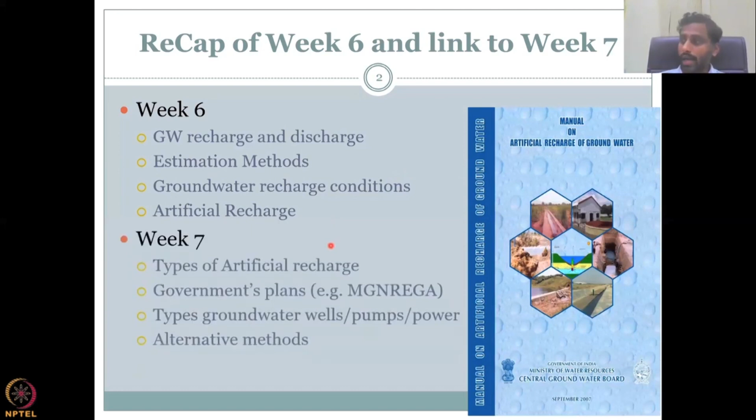So what are you going to look at in week 7? In week 7, we'll be looking at the type of artificial recharge systems, especially for the Indian rural system and the cities. We won't look at international standards because the availability of water, the groundwater hydrology, the geology is different. So we would focus only on the studies in India and the methods that can suit India, which is given here in this book also. There's a plethora of methods. We'll use most of the methods in this lecture.

We would also look at government's plans. This book itself is a government plan, but also how they use schemes to augment groundwater recharge. We would look into types of groundwater wells and pumps and power. Since we are looking at recharge and discharge from week 6, it is important to understand how you get water in and what are the key pathways or key methods in which water is extracted. And that is why we have a session on type of groundwater wells, powers, pumps, etc.

And it is also necessary to look at alternative methods. Similar to recharge, we have alternative methods for increasing the recharge. We also have to find other methods to artificially give more power to these recharge systems and or discharge systems. For example, can we use solar power rather than electric and diesel power, thereby reducing the carbon pollution due to diesel pumps, etc. So all these things we will look at given the time. And some of the methods we'll also look at in the next week.

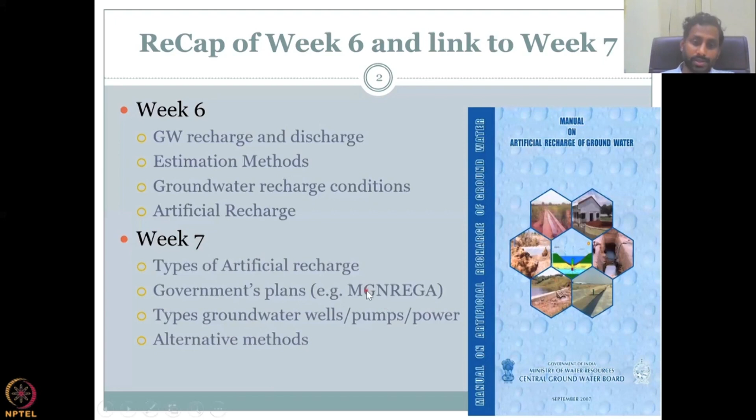Types of groundwater wells, pumps, etc. we'll be discussing. Moving on. Let's look at the planning for structures. Before we even get into the type of structure, it is very, very important to get into the planning. How do you plan what type of recharge structure to build?

Suppose I give you this book and say there are 10 methods. What are the methods that you will use in your location? Let's say your village or your district, or even your urban area. And that comes from a fundamental understanding of what is inside the ground, what is the water availability and the demand.

So it is very important to establish ground facts, as I put at the first point. You need to understand the reality in the ground before you propose these artificial recharge structures. Because many a times you would see these recharge structures, at least in villages, which are broken, not maintained well, and they don't give much groundwater, which means they're a failure. And that happens because the underlying fundamental principles are not understood, or these ground facts are not acknowledged. Let's look at some of them.

Storage capacity of aquifers. If you know the thickness of the aquifer, then you know how much water, given the specific yield, can be stored. You can have a big aquifer, but if the specific yield is very, very high, like for example, gravels, water will just move down. So you're not going to store the water. So this is a very, very important aspect of groundwater recharge for using.

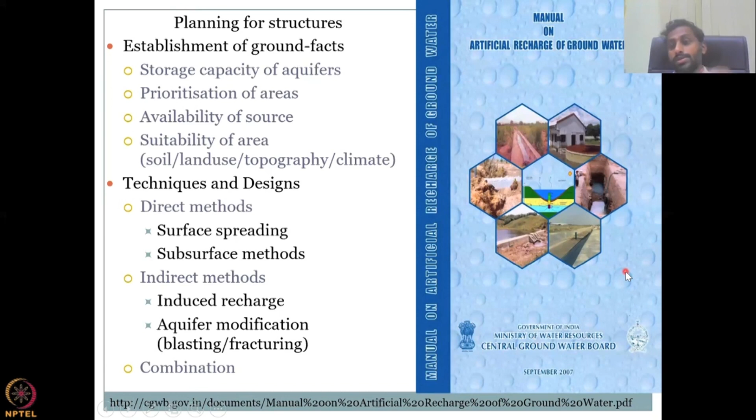So the link for the book is given below. You could see it as a PDF. It is free and anyone can use it. And to be honest, there are a lot of citations inside the book that can also be taken for future reference.

Establishment of ground facts. This is very, very important. If you don't understand what the reality is, you could sit at your office. For example, I'm sitting here in my office and I can put all these groundwater recharge plans, but it won't work. I can even run a hydrological model, MODFLOW, a groundwater model, but it will not run. Why? Because there is a need for understanding the ground facts.

So for that, what are the methods used? Participatory rural appraisal, or PRA as we call it, is a method for interactive processes of social development, wherein you talk to the people. You can see on the ground, Dhan Foundation is doing it. So you communicate with the people, you sit multiple iterations, you discuss the issue, you discuss who is going to take care of it if these systems come in place. Okay. And also understand the actual need for it.

Do you actually need a groundwater recharge activity, or can you manage it with other aspects? Establishing the need, as I said, is very important because you could also have water from channels, you can have water from rainfall, you can better use your demand estimates. You don't need to go to groundwater recharge because you may have enough water, you just don't know how to use it. The other aspect is understanding the other priority needs in the village, because if you have limited resources, you cannot put them all into groundwater recharge, money, time, etc.

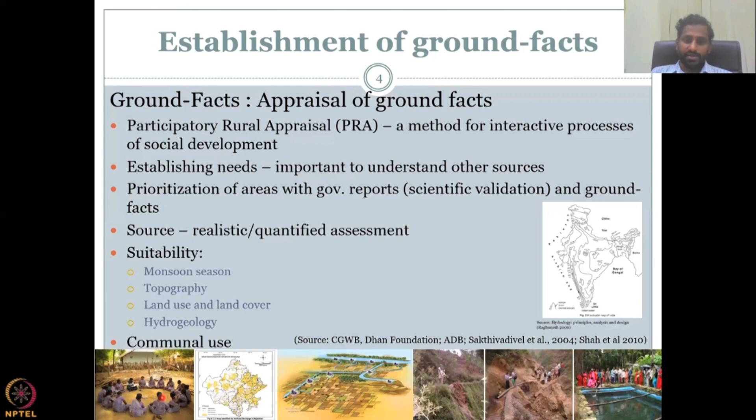Let's look at some of the methods.

The most important is the direct methods. Okay, directly applying water, whereas an indirect is you do a particular method for something else. However, the groundwater gets recharged. For example, forest cover. You increase forest, but by increasing forest, also the groundwater recharge increases because the infiltration increases, percolation increases. So let's start with direct.

In the direct method, you are increasing the contact area and residence time of water so that water and land have more time to talk to each other and then recharge. So that is the problem now. If you don't give enough time for water to talk to land and then say, I'm going to infiltrate and percolate, then recharge won't happen. That is what's happening in a high slopey land. Water touches and goes down.

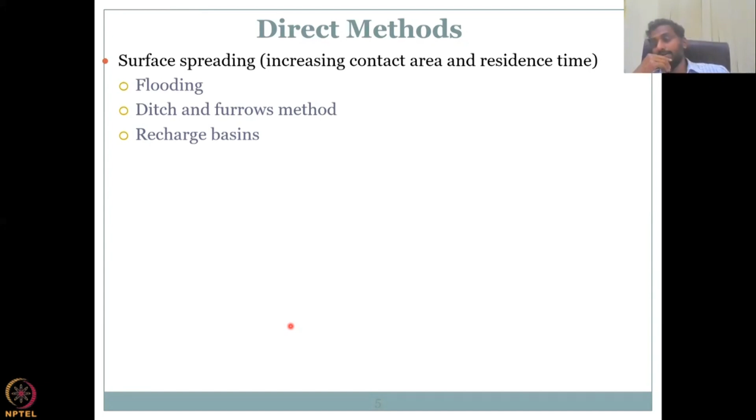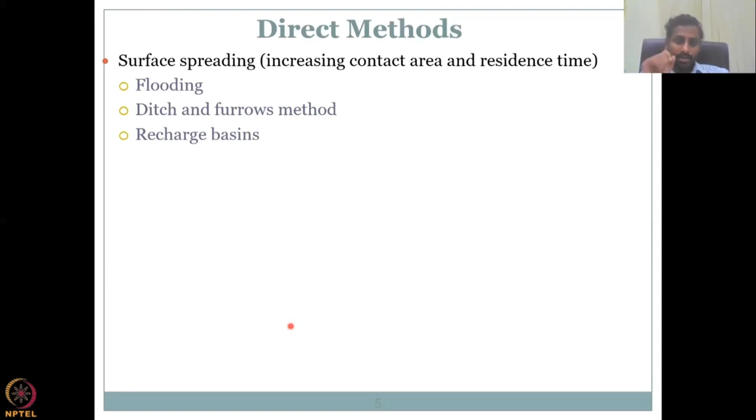Okay. So the surface spreading method actually increases the contact area. I'm going to directly apply water on a land and then recharge it. And of that, there are three important methods for India: flooding, ditch and furrow method, and then recharge basin. In the flooding method, as the name suggests, it is more like you're flooding the entire land, and then you're looking at how recharge happens.

The ditch and furrow method, you are constructing parallel sequences of land furrows so that water can run through, and wherever it is running through, it will recharge. Whereas flooding is just applying throughout. I'll show you some examples. And there are something called recharge basins, which are more engineered, more specific for groundwater recharge, and have some designs, etc. More construction.

Then in the other direct methods, you have runoff conservation methods, basically arresting your runoff. You're stopping your runoff, which is your rainfall runoff. I've showed you in the hydrological equation. Water flows in, and then this water flowing out of the basin is stopped periodically somewhere and then recharged. So some of the methods are bench terracing, contour bunds and contour trenches, gully plugs, nalah bunds, and check dams. Very, very famous word, check dam, because it has actually helped in a lot of locations in India.

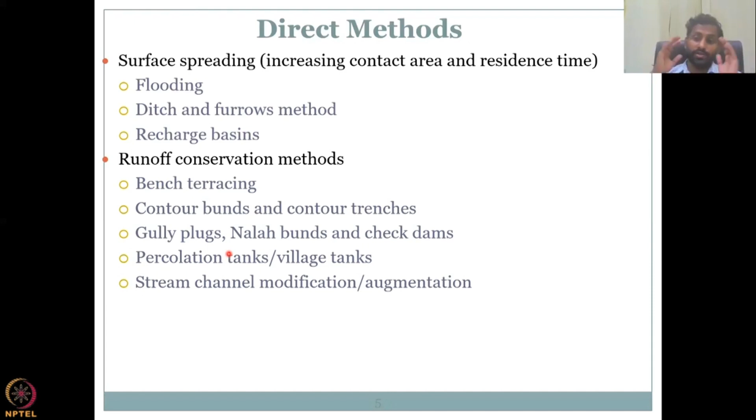Percolation tanks, village tanks. So percolation has a very particular connotation that it has to increase the rate of water moving through the soil profile, and it can happen anywhere, land in terms of rural, urban, peri-urban, etc. Whereas village tanks are mostly for agriculture and for village use.

And then there are subsurface techniques. Okay, the subsurface techniques include the subsurface region. I'll draw here. You have your land, and then you have your subsurface. Then your unconfined aquifer, confined aquifer. Okay. Then the subsurface, which is just the small thickness under the ground, where it is not under the ground too much or not the surface, it is subsurface.

Okay, where you can put wells like injection wells, recharge wells. Injection, as the name suggests, you inject water; recharge, you slowly recharge water. Gravity head recharge wells, recharge pits, and shafts. So this subsurface can go anywhere until your unconfined aquifer, whereas your recharge pits and shafts go much deeper.

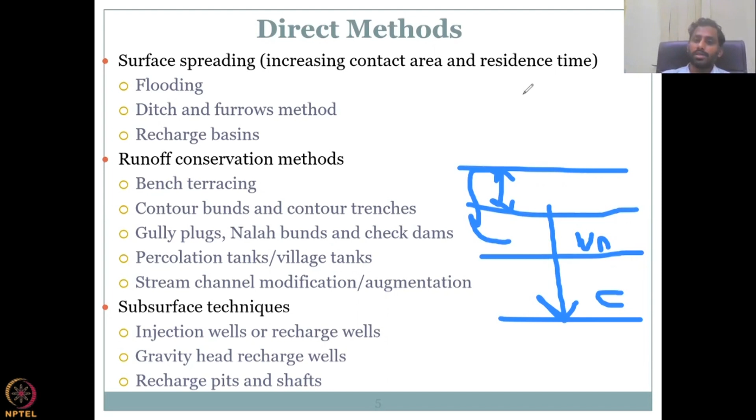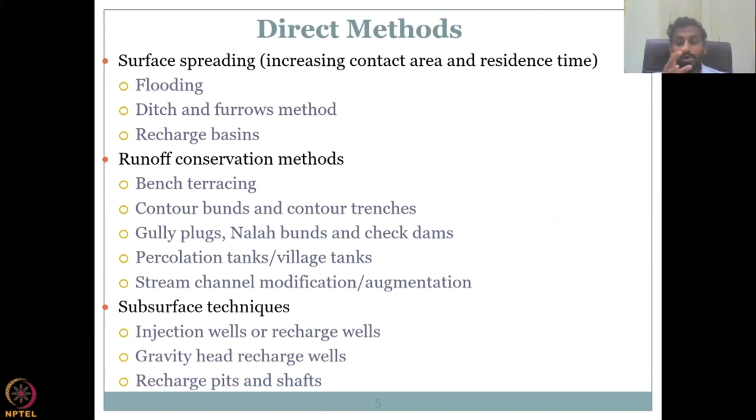So these techniques have their own positives. All these are positives for groundwater recharge, but they have their own challenges and why it's not working in India, which we will cover, which is very important to understand why a system works and why a system doesn't work.

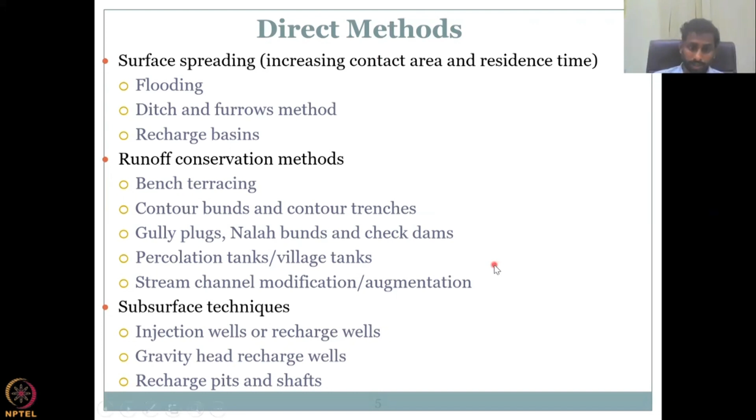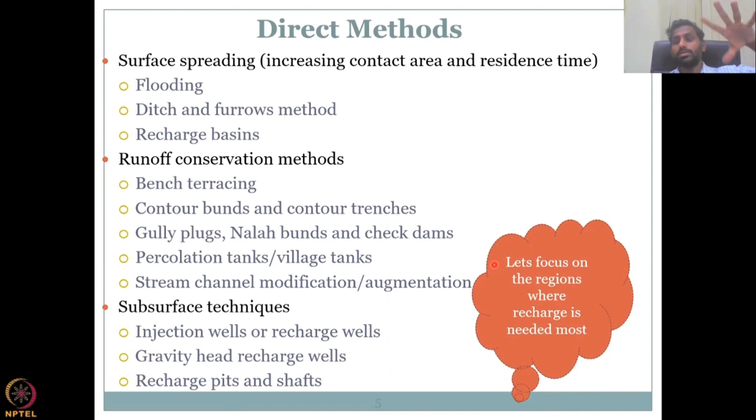Okay, so in due course of time in this course, we will focus on the regions where recharge is needed most. Because if you remember the CGWB map of where the critical zones are, the Punjab, Rajasthan belt, places in Gujarat, Karnataka, Tamil Nadu, in the west regions of Assam, you have a lot of critical to semi-critical locations, but more importantly, you have overexploited locations. Rajasthan, Punjab, Haryana, Delhi, all these are red, which means groundwater is extracted more than the recharge.

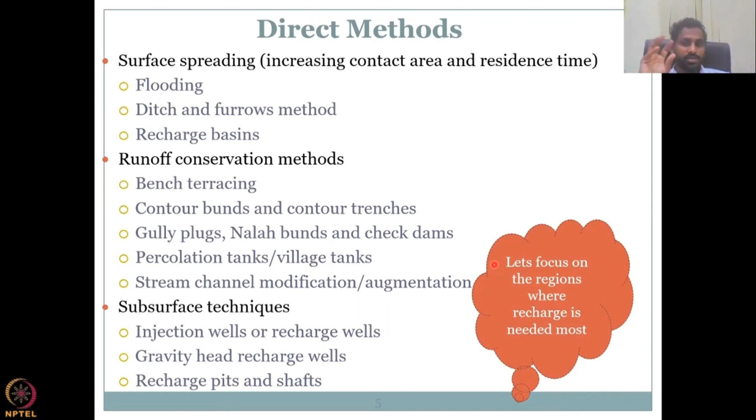So even though there are so many methods, as you see here, we will be focusing on the regions where recharge is needed most. And that will be handpicked from the CGWB's report, and then we will discuss it in the following lectures.